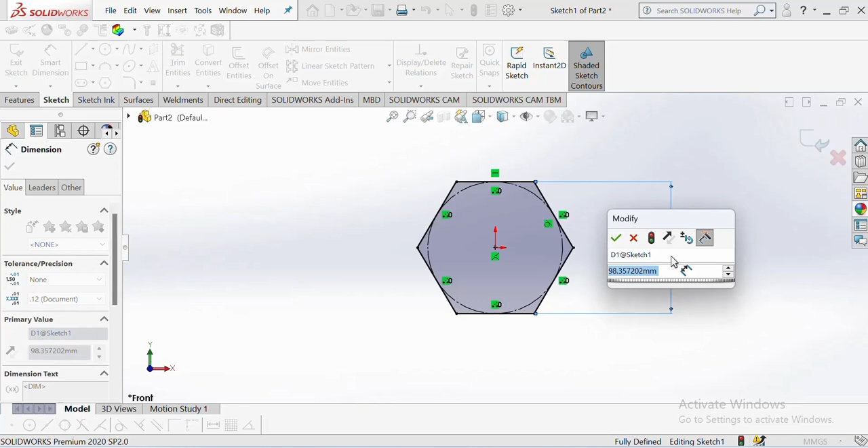Make sure this side is horizontal. Then choose dimensions, apply dimension of this side of this polygon, give this one 20. Say yes. Go to feature menu, extrude boss.

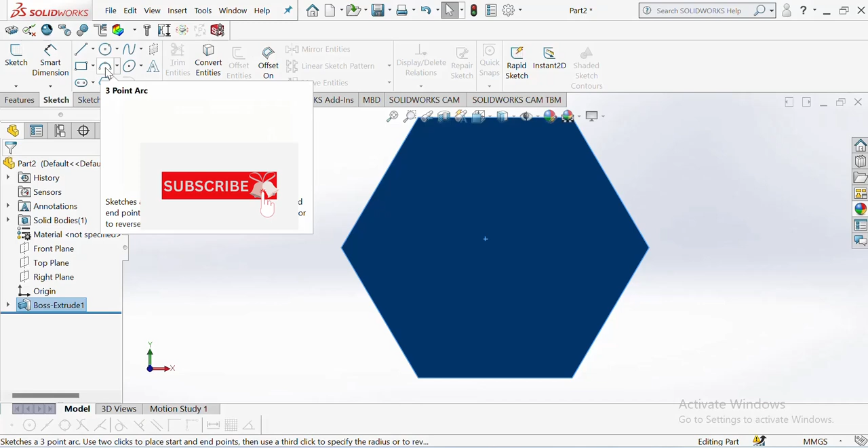Apply end condition mid plane, extrude up to 10, say yes. Select this face, normal. Choose circle, draw one circle from origin, yes. Select this circle, hold Ctrl key on keyboard with this side, make them tangent, say yes.

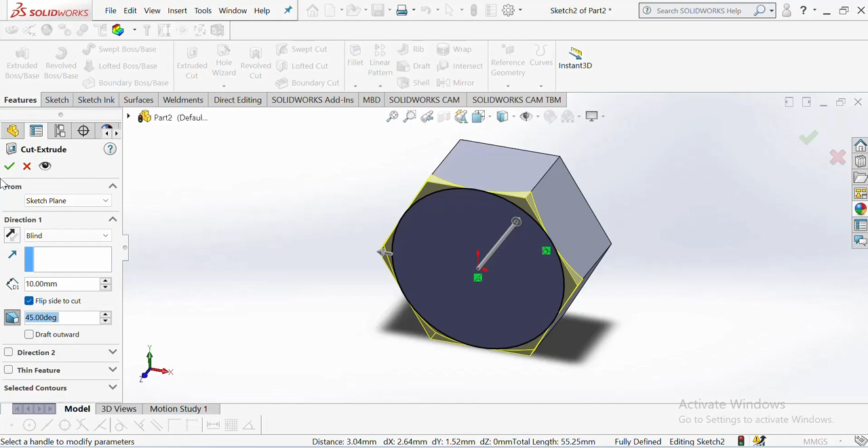Let's make this one like this. Go to feature menu, extrude cut. Choose this one, flip side to cut, make this angle of 45, and say yes.

Select this cut extrude, mirror about front plane. It is going to cut on another side, then say yes. So we have the same cut on both sides.

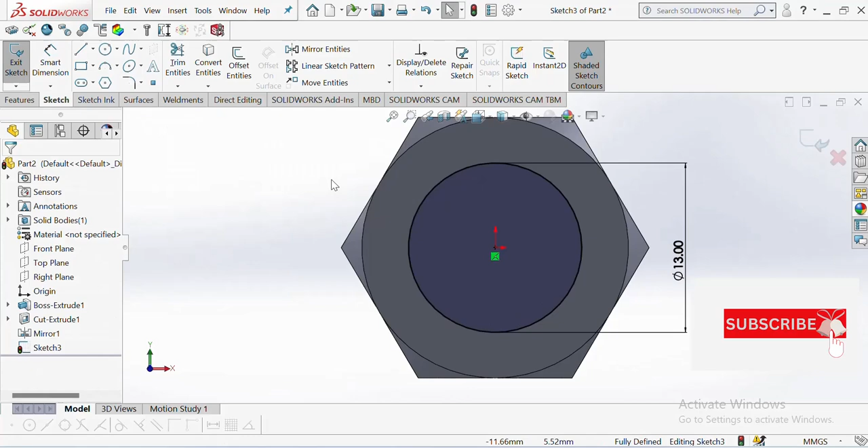Select this face, normal. Go to sketch menu, choose circle, draw one circle through origin, select, dimension this circle, give diameter of 13 mm. Say yes. Go to isometric to have normal position. Features, extrude boss, give this length of 50 mm, 15 mm. Say yes.

Make plain white. Select this circle, apply chamfer. Make sure the distance of chamfer is 1. The angle of chamfer is 45 degrees. Say yes.

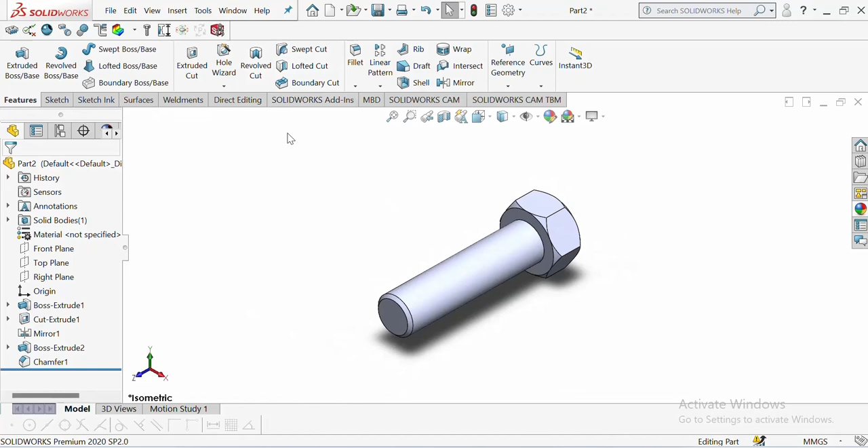Now let's apply thread. You should go to insert menu, features, and then choose thread, or come to hole wizard and then choose thread. Yes. Here choose the start point and end point.

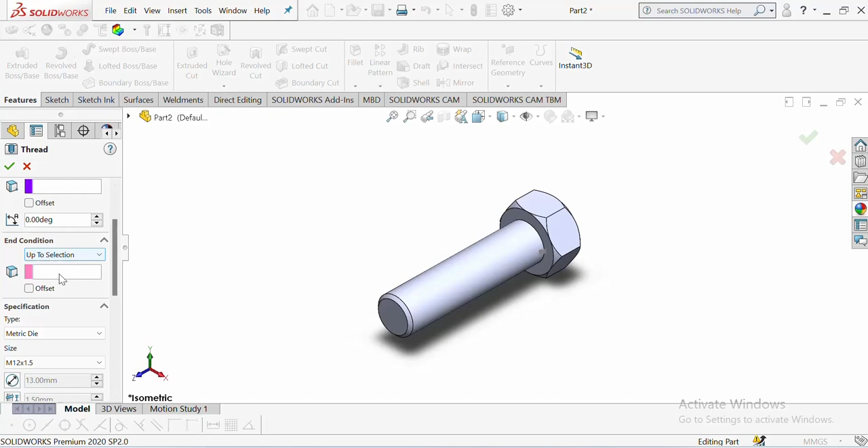For this thread location, choose this circle as start point, and come to end condition, select up to selection, choose this one and select this face as end point. You see?

Then we are going to make an offset, some distance between bolt head and thread. Choose this offset. We are going to make this distance between bolt head and thread. By this now, let's adjust this, 5 is enough. This is enough. Then make this specified threads, dimensions, specification.

Come to these specifications and choose this metric die. Choose metric die and choose this size of threads, M12 as bore diameter and 1.5 as pitch. Okay. Then come to this offset and try to adjust the length out of the box length, specify 1 mm is enough.

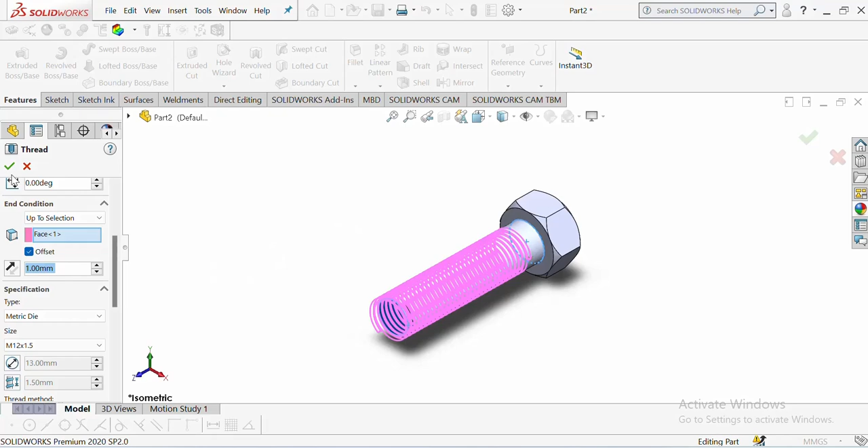And say okay. So as you see, my threads are now good on the bolt.

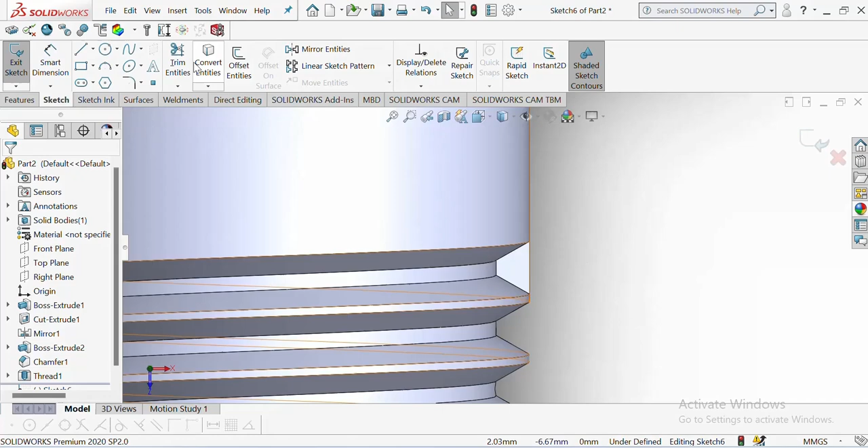Let's try to cut this one to have the proper shape of thread. Normal. Select this face, sketch. Go to convert entities. Select this one. Say OK.

Then go to feature menu. Choose extrude cut. Apply end condition through all. Select OK.

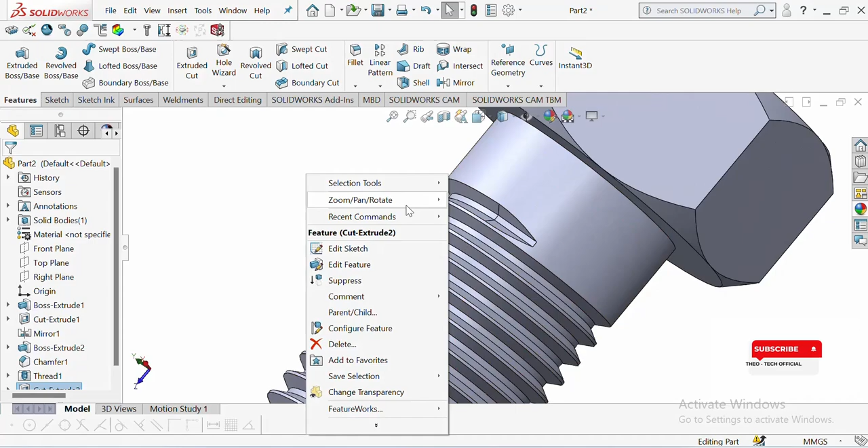So you see, then we have this proper good thread cut out. You see.

So my bolt is now ready. Let's save. Save as bolt. You go to any destination and create a folder and save your bolt there as bolt.

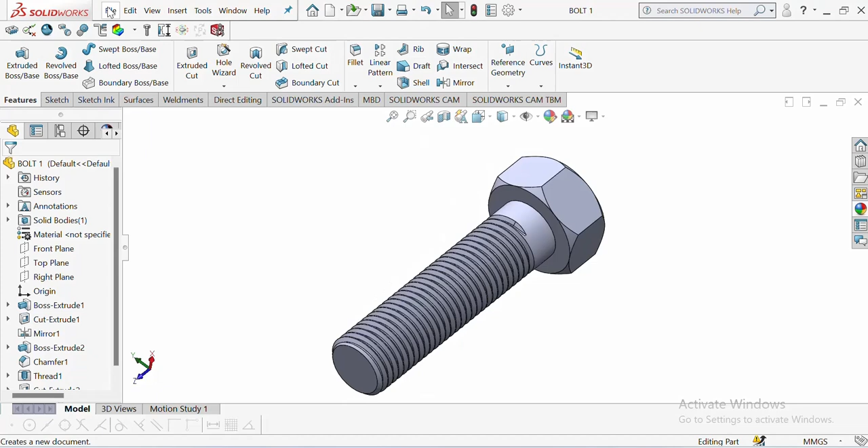Go to file new, choose new part, say OK. Select front plane sketch, choose polygon. Specify the parameters of this polygon with 6 sides. Start through origin. Yes, select.

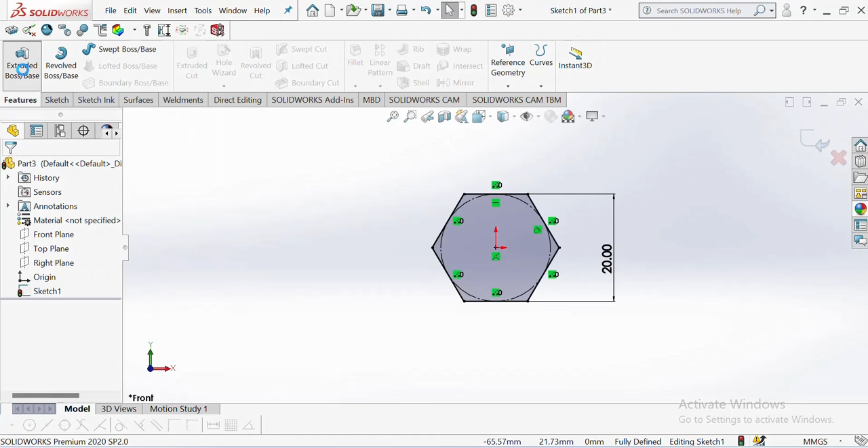Make sure this line is horizontal. Then apply dimensions. Give this side with this one 20, diameter of polygon. Say yes. Select. Then go to feature menu, extrude. Extrude up to 10. Apply end condition mid plane.

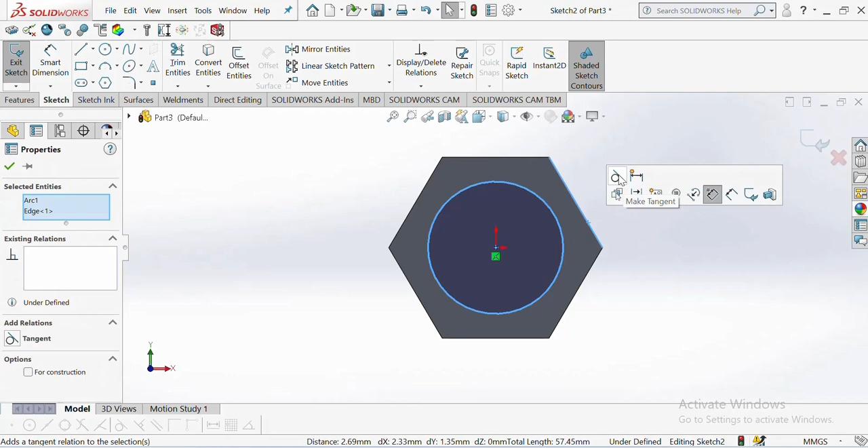Say yes. Select this face, normal to. Go to sketch, choose circle. Draw one circle through origin. Say yes. Select this circle. Hold Ctrl key on the keyboard. Select this side. Make them tangent. Say yes. Go to isometric to make this shape normal.

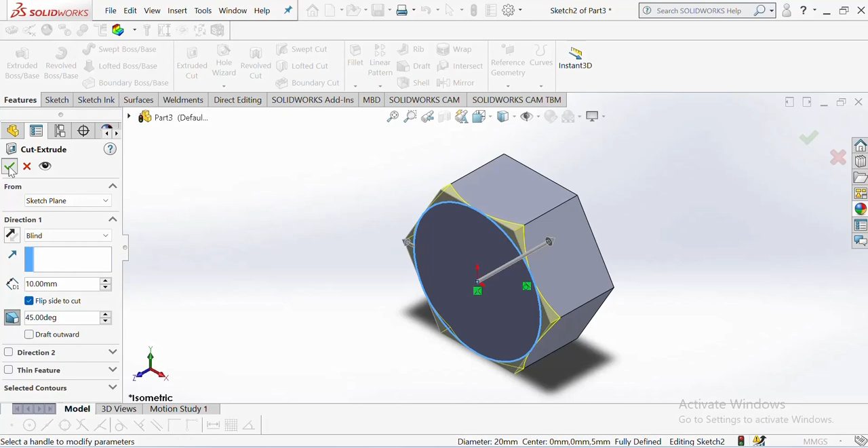Select this circle. Go to features, extrude cut. Choose this one, flip side to cut. Yes, then make angle of 45 degrees. Then say yes.

Select this cut extrude. Choose mirror about front plane. So you see we are going to have the same cut on both sides. Say yes. Select this one, normal.

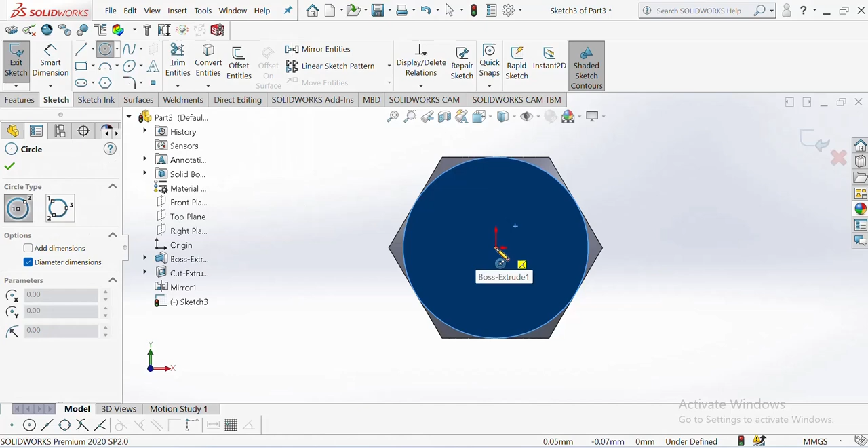Go to sketch, choose circle. Draw one circle through origin. Yes. Specify the diameter of this circle. Give this one 10.38. Say yes.

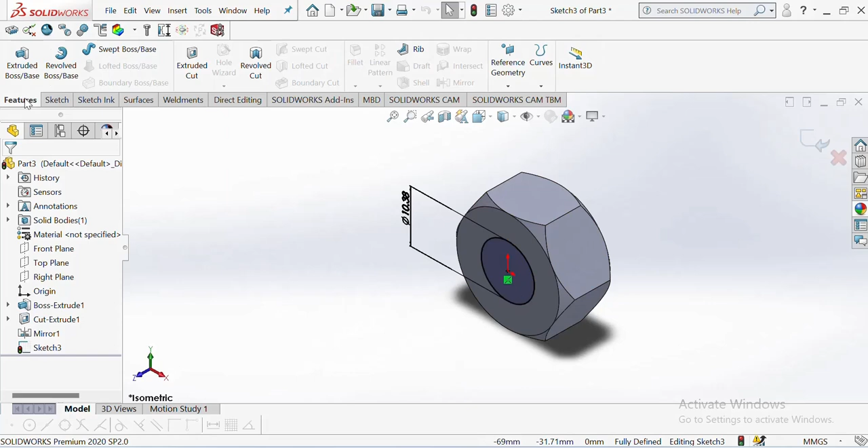Select. Go to isometric to have normal position. Go to features menu. Choose extrude cut. Apply end condition through all. Yes.

Select this side, this circle with this one. Apply a chamfer of distance 1 and angle of 45 degrees. Say yes.

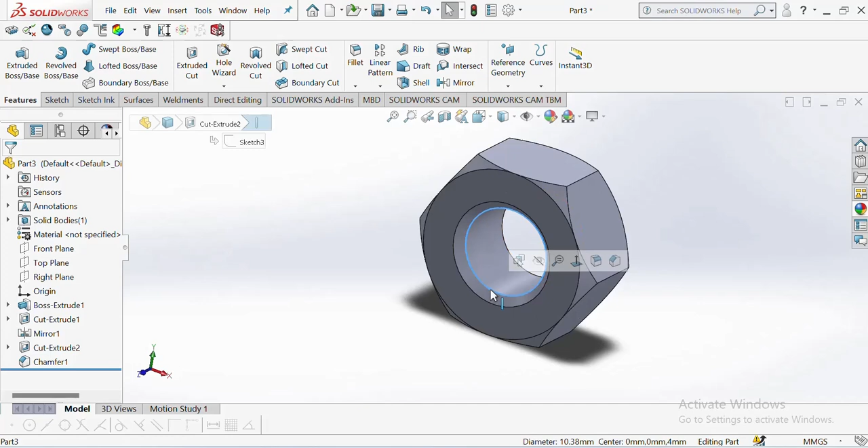So let's insert internal threads. Select this one as start point. Go to this hole wizard and choose thread, or come to insert menu, choose features, and then find thread. Yes.

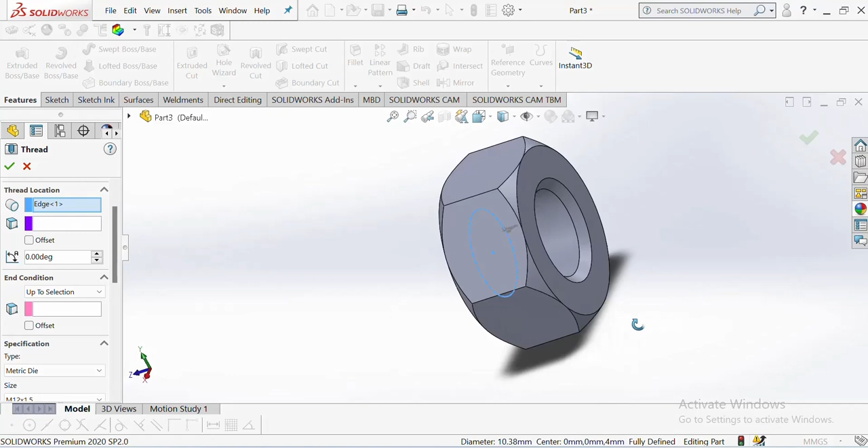So choose this one as start point and end point. Let's have this side and select end point and then choose this face. So you see some threads are not properly outside of the nut.

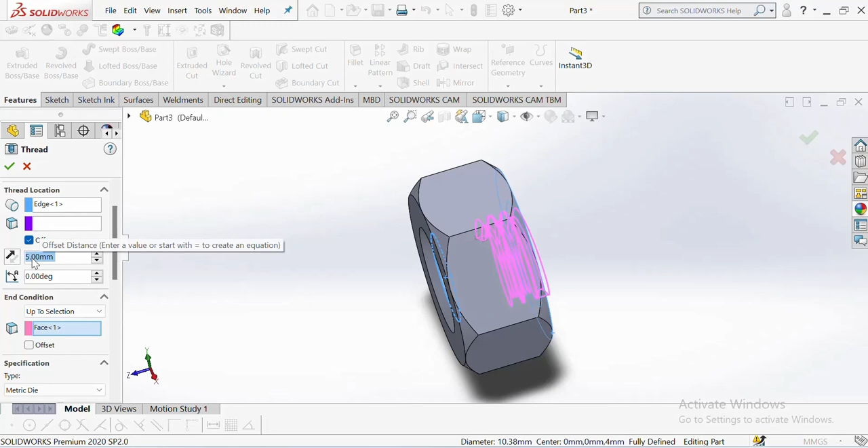Choose this one as offset. Let's give offset of 5 mm and choose reverse direction, you see. So you have both a thread outside of the nut at both sides, you see.

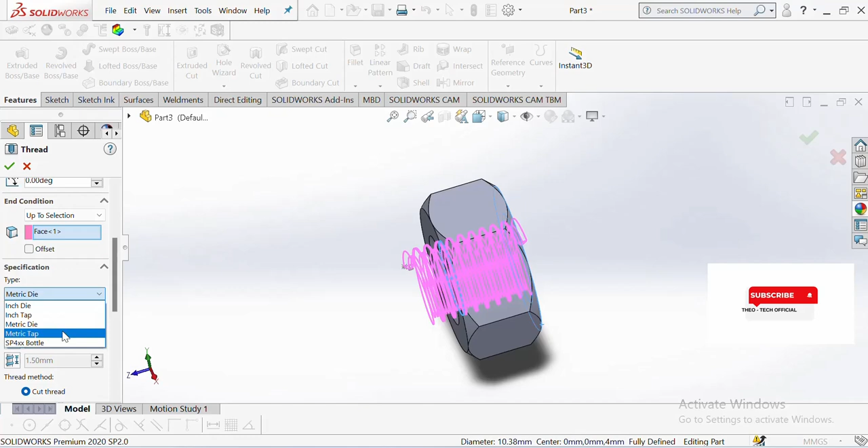Then let's have this specification of the threads, internal thread. Select this one as internal thread, select metric tap. Select this metric tap as internal thread and specify the size of thread. So M12 as diameter and with 1.5 as pitch, thread pitch.

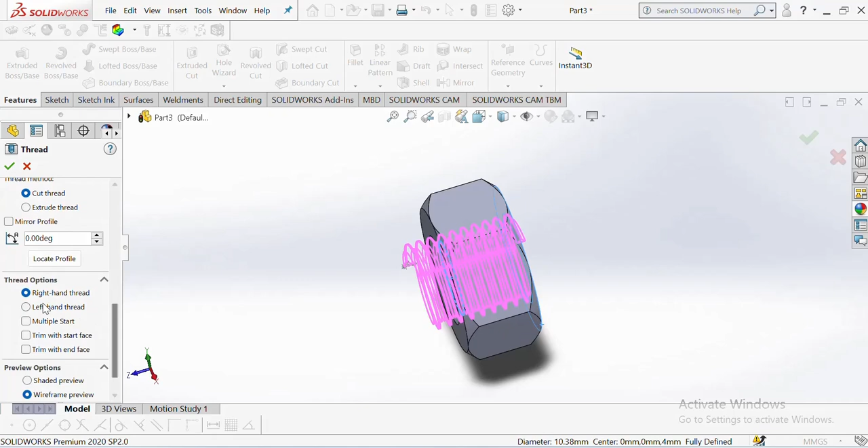Yes. Thread method, cut thread. Then choose this thread options, right hand thread and say OK. So now we have proper internal thread, as you see.

Make plain white. Yes. So save as nut. Yes.

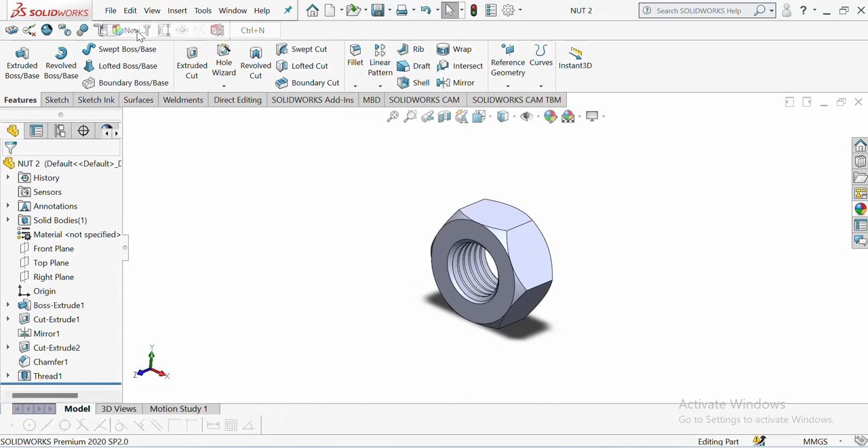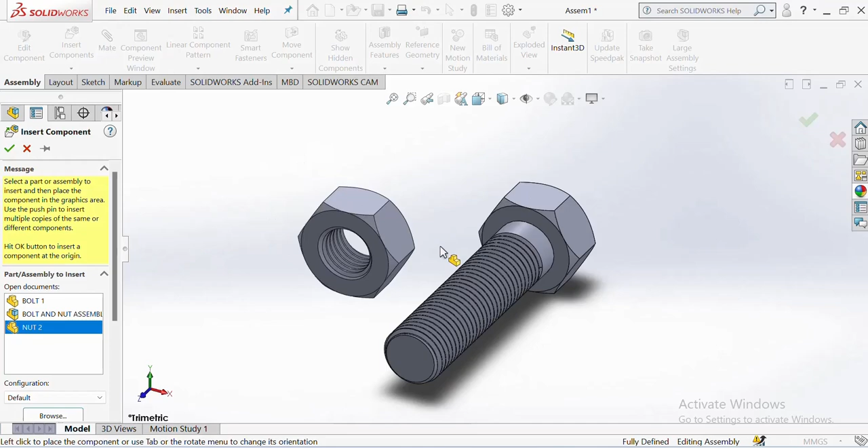Go to insert component. Then choose this nut. Then say open. And place this one. Make this plain white. Yes.

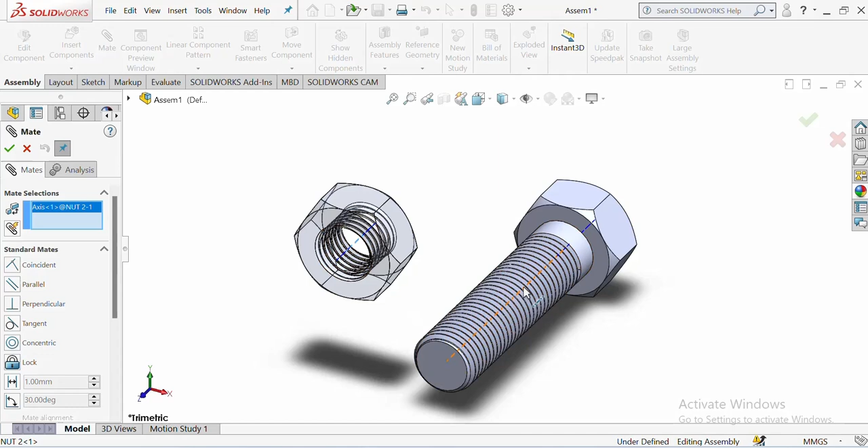So go to this page and show temporary axis. You see? Then choose mate. Select this axis with this one. Say OK. Yes. So go to this graphic area and say hide this temporary axis.

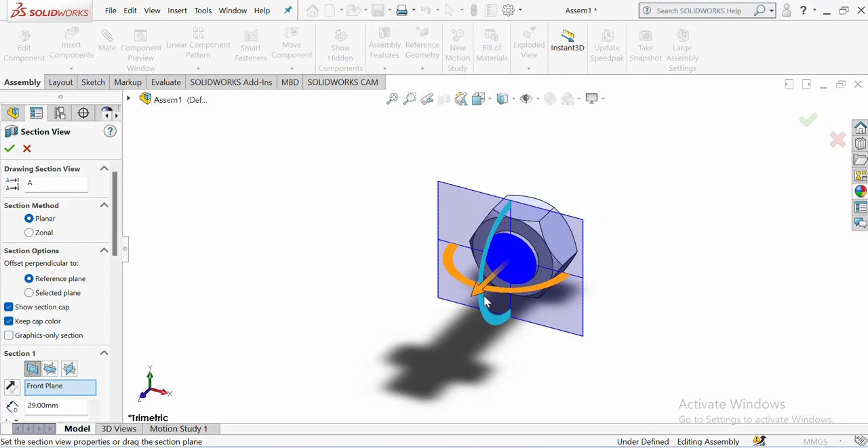Click on this section view. So go to this part assembly. Click on the bolt. Choose front plane. Say OK. Yes.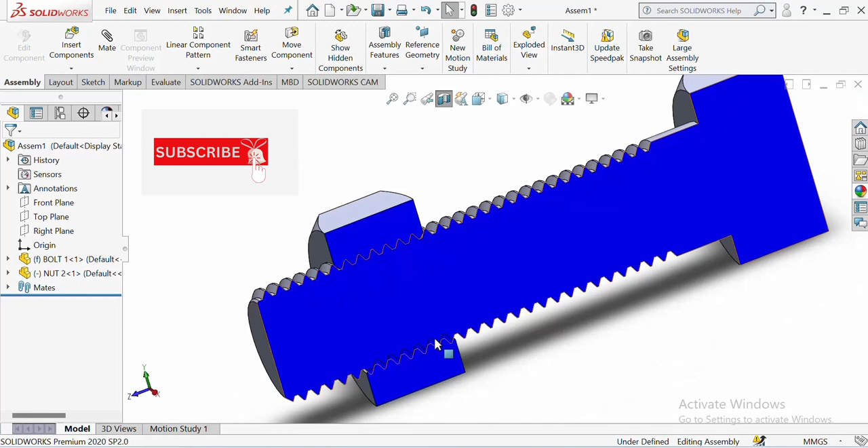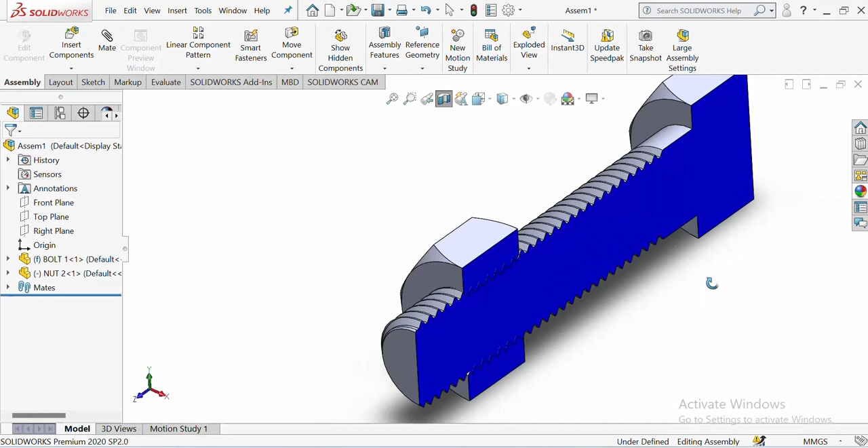So make sure that the threads are properly matched. Make sure the pitches are matched properly as this one. Try to match the pitches properly. Yes, this is yes.

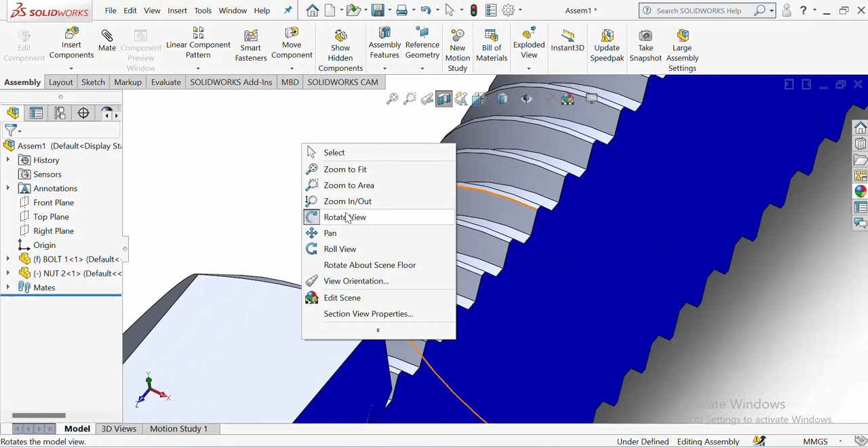Choose mate. Then select this mechanical mate. Choose screw. Again, choose this distance per revolution. Add 1.5.

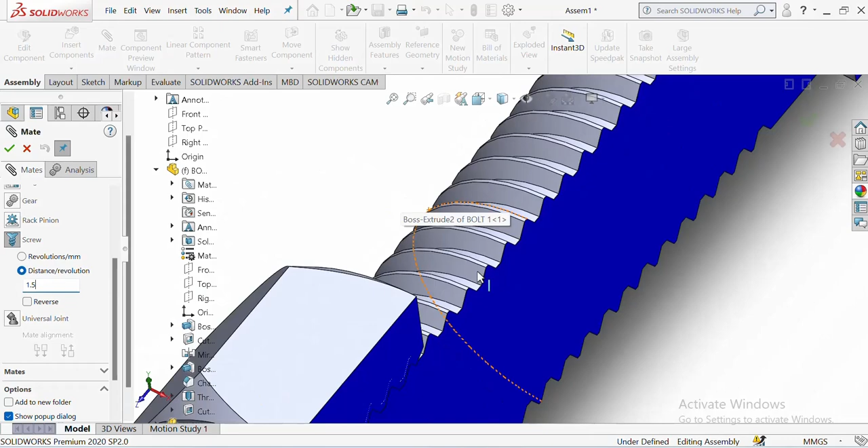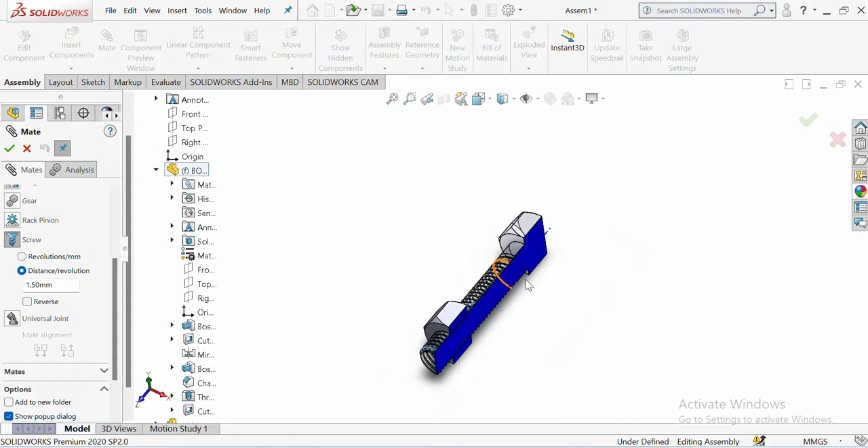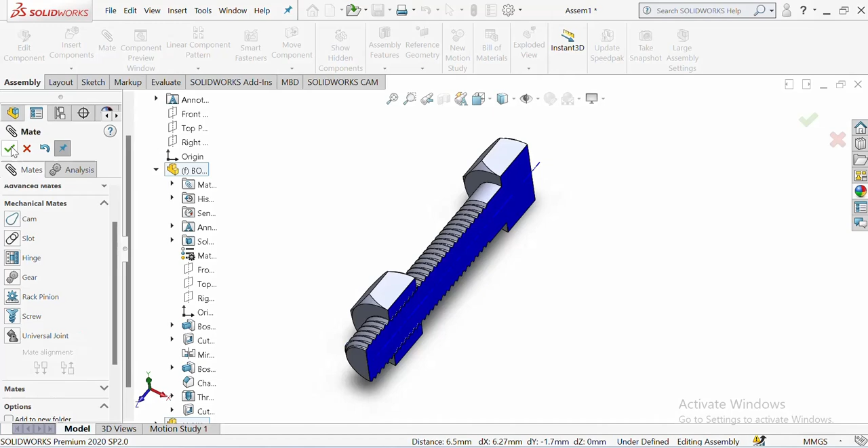And then select this face. Go to this one and select this temporary axis. Select this axis and also add this, adjust this distance per revolution, 1.5 millimeter. Then say OK. Say yes.

So try to rotate. It is rotating like this one, you see? This is yes.

So go to this page, try to hide this one, and then cancel this section view. And try to rotate. It is rotating like this one. Yes, the pitches are properly matched.

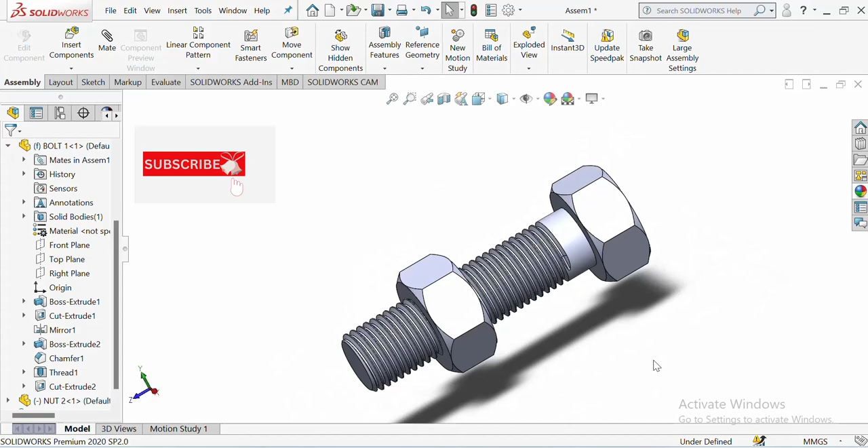Choose mate. Choose this one, advanced mates. Make the distance between this head of bolt and the nut. Apply distance, give this one 5 millimeter and select this face.

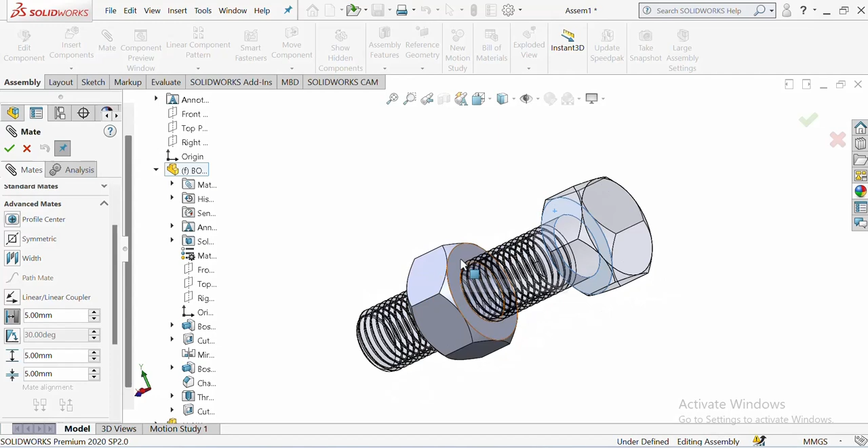And choose this one, face of nut. You see? Then apply distance. Keep this distance 50 millimeter. Okay, with this one, also the distance at the end 5 millimeter. And say OK. Say yes.

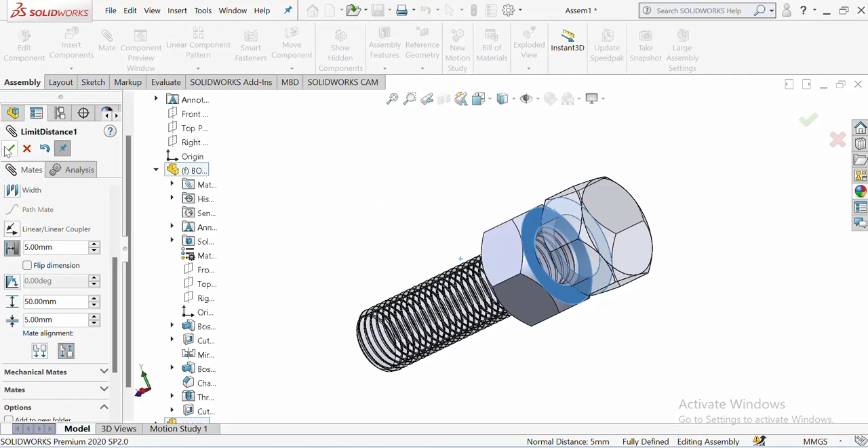So then try to rotate so my pitches are properly matched. Yes.

So now let's apply motion study. Choose motor. Select this one as the direction of motor rotation. Select RPM of 40 RPM, revolution per minute. Make sure this motor type is rotary motor and say yes.

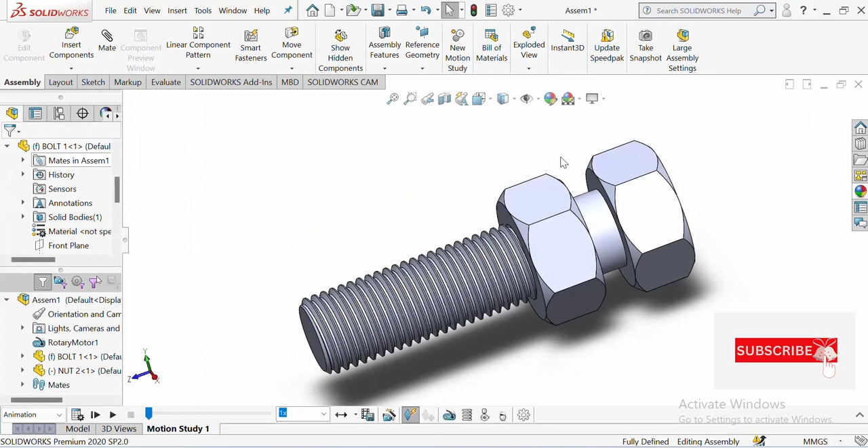So go to motion study, choose this one to add frame. Frames per second, apply this one 15. Say yes. Let's have this one and drag to 20 seconds. Let's check. So then calculate. This is yes.